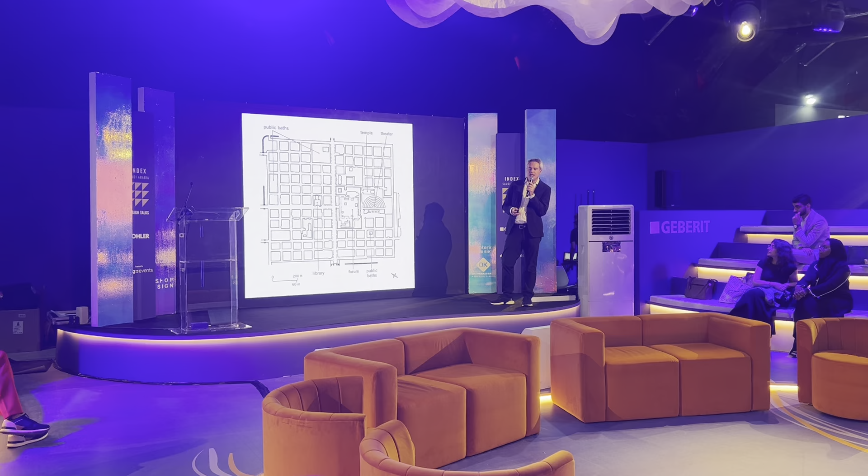spanning across different typologies from residential, cultural, offices, and infrastructure projects. One of the things I would like to talk about today is why we design the way we do and what inspires us. One of the interesting notions is that architecture from Roman times to the Forbidden City in China to Chandigarh—pretty much 3,000 years of architecture—hasn't really changed much.

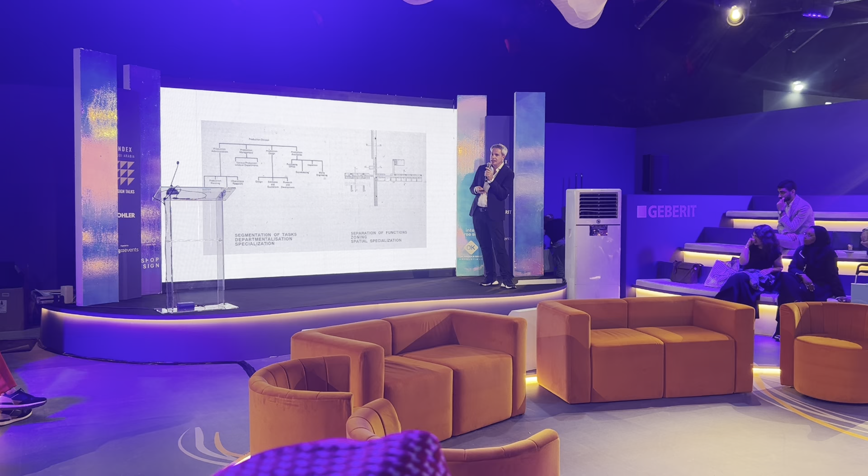Even modernist architecture, which tried to break out from tradition, really just replicated similar geometries and similar standards of architecture that the Romans established over 2,000 years ago. This was a very successful model, one that was adopted all over the world, but one that ultimately failed to fulfill the needs of modern society.

The reason it fails to meet the needs of modern society is because architecture cannot cope anymore with the complexity of our daily life, and buildings are starting to fail us. You can see cities around the world looking more and more similar to each other, so you don't know whether you're in London or in Moscow.

The usual answer from architects has been to deliver very uniquely designed buildings, i.e. icons. Unfortunately, these icons, at one point, start to cancel each other out, and you start to lose the uniqueness because you have this cacophony of images.

The same happens even here in Riyadh. Cities more and more, whether in Asia or Europe, start to look similar. One of the few things that helps us organize this chaos is actually natural systems, like the River Thames. That's really what inspires us as architects.

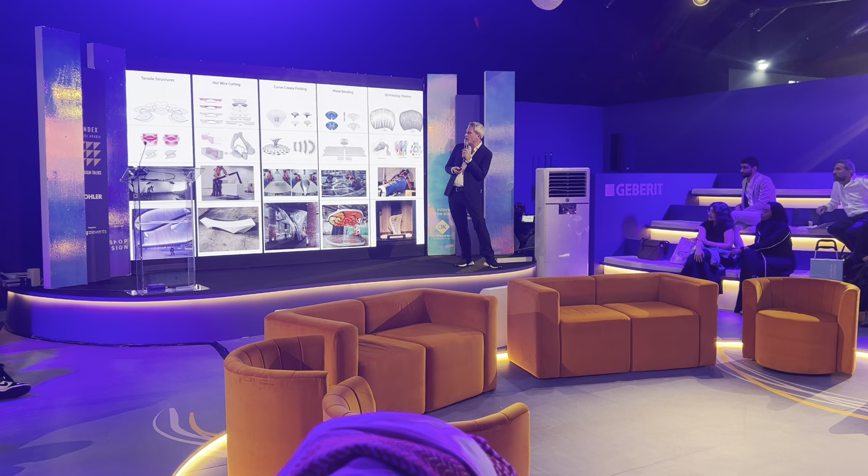We do that through digital means, through model making, through internal discussions and presentations. We also created a series of groups that specialize in innovation, where we create our own tools, our own robots, our own construction machines, because industry wasn't catching up with us fast enough.

We've been doing that with concrete and with timber, and we decided to bring some of these robots into the office, where we can make our own molds for our concrete systems.

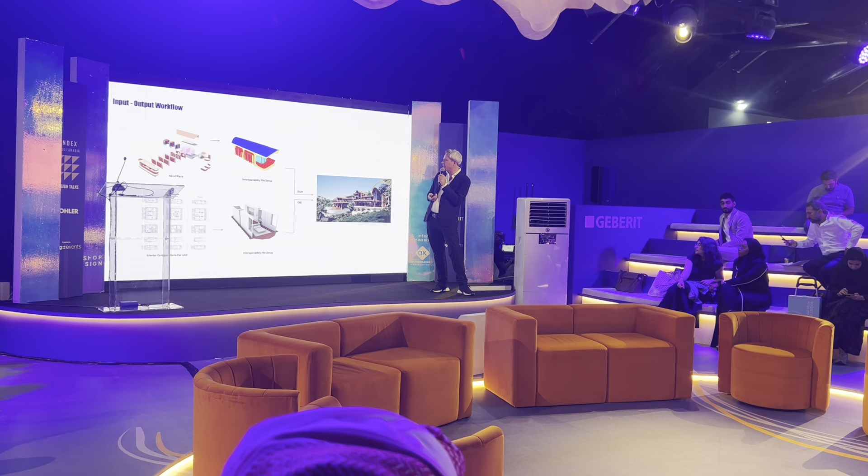The next generation of design is actually moving towards the metaverse and towards spaces of collaboration where our clients and consultants can physically or virtually enter the space and collaborate in a third dimension, where the clients of the future can customize their home through software systems, deciding from a kit of parts what their home will look like, creating unique designs different from what we anticipated in the first place.

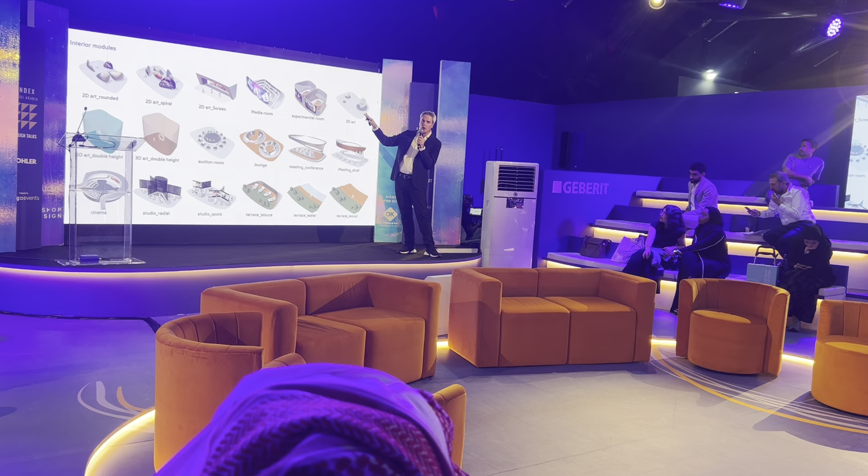So the role of the designers becomes more about giving a kit of opportunities and elements, and then leaving the end user to compose the world that works better for them.

Some of the key design inspirations we constantly work on is the idea that vertical towers should not just be vertical, but should have some kind of volumetric articulation to respond to what happens inside the tower, and to the structural needs and forces that move them.

How we can create fields through repetition and differentiation. How do we create a different system of self-similar buildings that actually coexist in a coherent ensemble?

And how we touch the ground, how we create a more human scale approach to large scale buildings, with connection to citywide infrastructures such as car parks and metro stations coming in directly from underneath our buildings.

The internal void is for us a very important element of design. This becomes the true element of connectivity for the users, a true space where we actually meet other people working in the same building or living in the same environment.

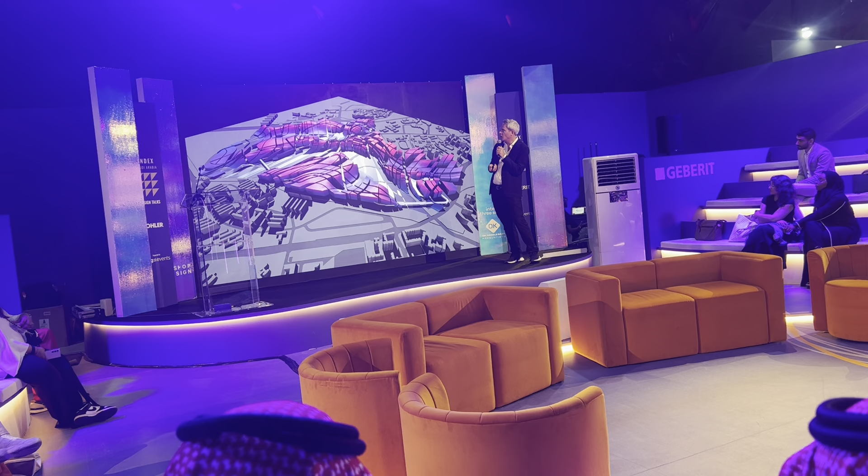I will take you through a number of projects we worked on throughout the years, different scales and sectors. This is the very first project we worked on, a master plan we did for Singapore, a whole stretch of the city called One North, which had a river formation in the middle.

We decided to create a kind of second nature, an artificial field where buildings are deformed by forces and by connectivity between them, not just by subdivision of the ground and plots, but more about creating physical connection between units and an overall roofscape and facade composition that will make sense for such a large-scale project.

We went back to a very similar theme five years ago for a project called Unicorn Island in Chengdu, where we had to design and build 1 million square meters worth of offices, residential, and hotels, as an incubator for startups in the south part of the city.

Our response to the brief was to create a project with the theme of the ellipse as a common motif, where the ellipses become courtyards, become interlocking elements, become towers, towers fusing with each other, towers breaking apart and creating loops and H shapes, and even ellipses creating the landscape around the island itself.

You can see how the element of the ellipse becomes also a three-dimensional motif on the skyline of the city and on the lake, and then again, coming down to the human scale approach and the landscape of the building.

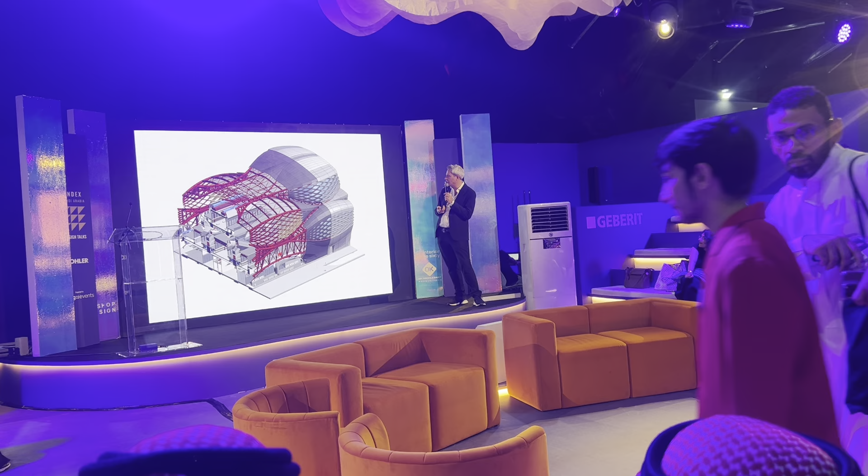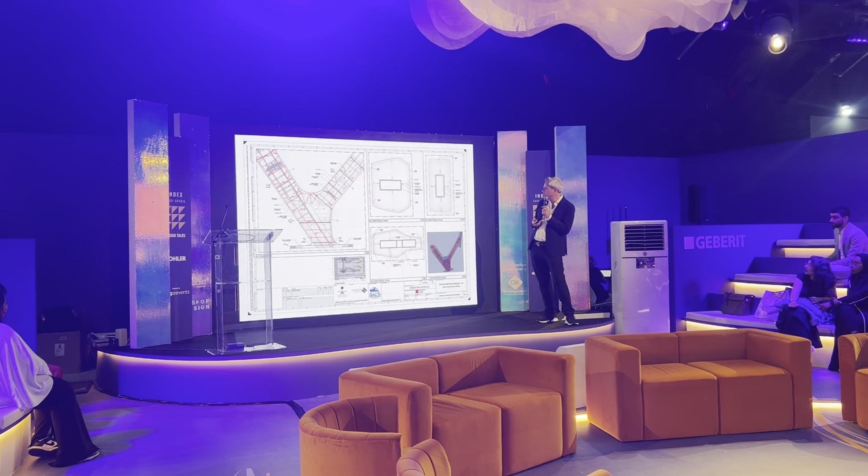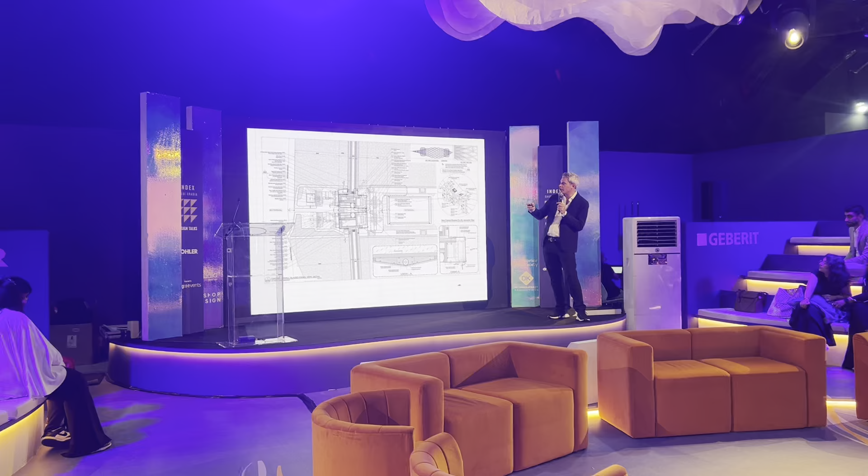You can see some of the initial pictures of the project, which is nowadays looking almost completed. This was done through enhancement of these digital models into BIM, where all the different disciplines had to input design data and coordinate their systems, and we could check for clashes. There were clashes, of course, but we were able to resolve them on the digital tool before going down to construction. We really went down to one-to-one and one-to-two details to make sure the final quality would be flawless.

This is one of the stadiums we designed for the Qatari World Cup in 2022. The design was inspired by the dhow, a regional sailing boat. We wanted to create a building with a roof that would be closed during the day and could open up at night, creating a lot of natural cooling of the building. The theme of this sail-like roof gets carried on the facade system.

Here you can see some of the interior shots of the stadium, with the cables that are holding up the removable roof.

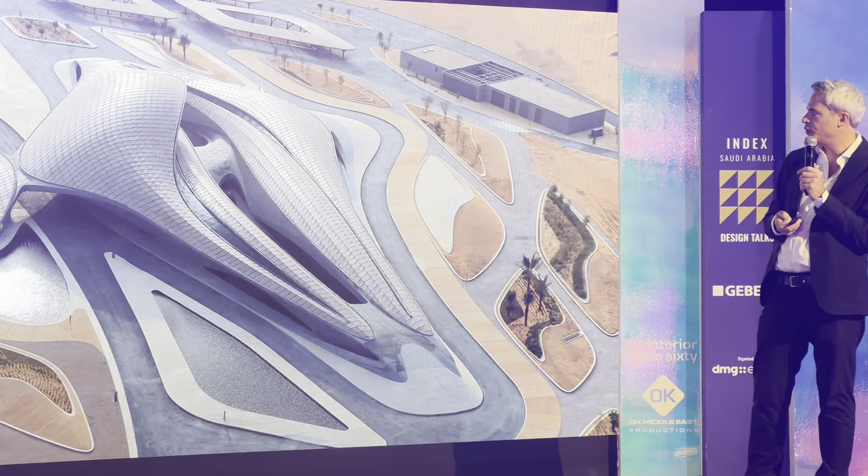This is an office building we did for Sharjah a few years ago, for BEEAH, the municipal waste treatment company. Sharjah is really pushing for a very low-impact refuse system, and they wanted their office building to reflect that. At the same time, the building was built very close to the refuse treatment plant in the middle of the desert, so we wanted to create something that looked as if it belonged there.

The geometries we used were borrowed from the dunes, and the dunes become this concrete roof, while the glass forms vertical elevations facing north. On the inside of the building we have natural light, and a ceiling that reflects diffuse light but also extracts heat, while ventilation is supplied from the bottom. Then we have the private office for top management, where more luxurious materials and timber come into play.

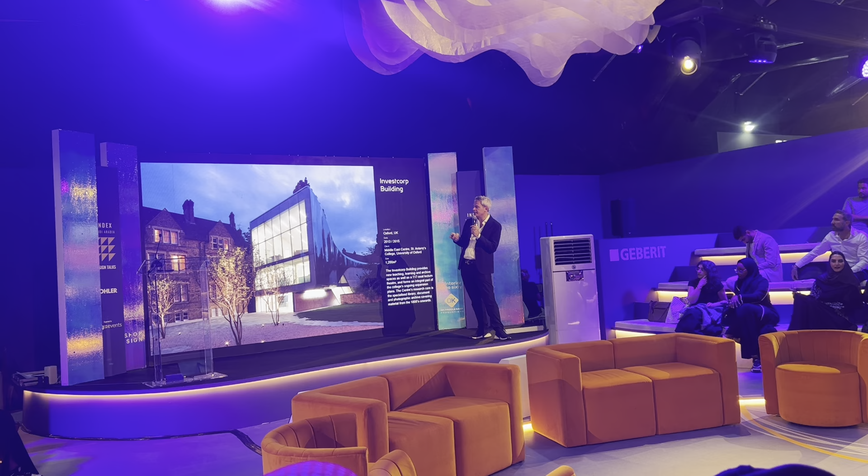That's a very small building we did in Oxford - an institute for Islamic Studies at St. Antony's College. One key challenge was dealing with heritage. The normal way would be to borrow and mimic the past, but what we wanted instead was something uniquely modern, quite strong, but at the same time very respectful, using stainless steel and brushed stainless steel to reflect the colors of the bricks around us and the sky - a building that ended up getting a conservation award for its positive impact on the student campus.

You can see here how there was an old tree that we decided to keep, and how the building form really kind of wraps around nature and allows nature to come in.

This is also a university building in Vienna, actually two elements of the campus for economic studies. We have two volumes that interlock, and in the clash between these two volumes we have the vertical circulation, as much as possible staircases, where we want to encourage students and professors to come together, exchange ideas, bump into each other, and have that kind of high performance campus the project wanted to create.

Very small office building in Prague, Czech Republic, where we created two volumes that face each other over the railway, with this beautiful golden geometry coming down from one of the towers. In this case, we were also able to design some interior spaces, such as the main entrance lobby.

Moving a little further away from us, this is the first project the practice did in China. It was quite a seminal project for us, because it was our first concert hall, and a building that sits over the Pearl River. The main inspiration and idea for us was to create these two pebbles, one for the actual concerts, one the rehearsal hall along the river.

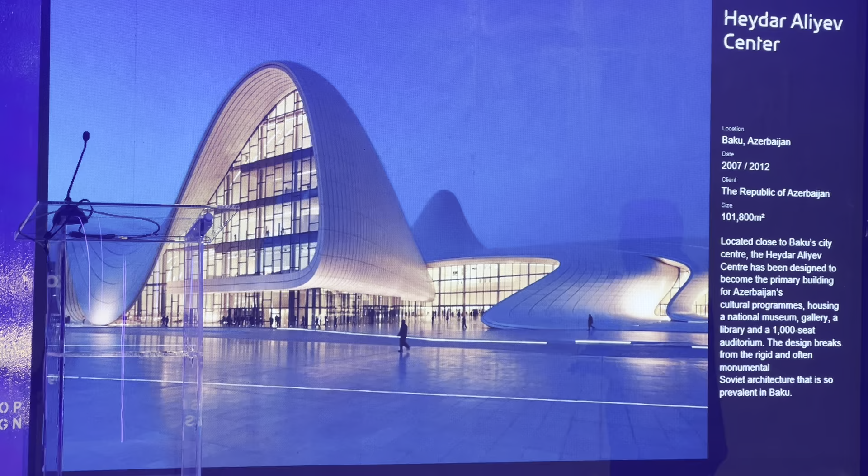Coming a little closer to us, this is in Azerbaijan, in Baku, where the current leader wanted to create a building to honor his late father, and at the same time house a library, a museum, and a theater. What we did was create this kind of undulating landscape where you actually don't know what is the building and what is the landscape around it.

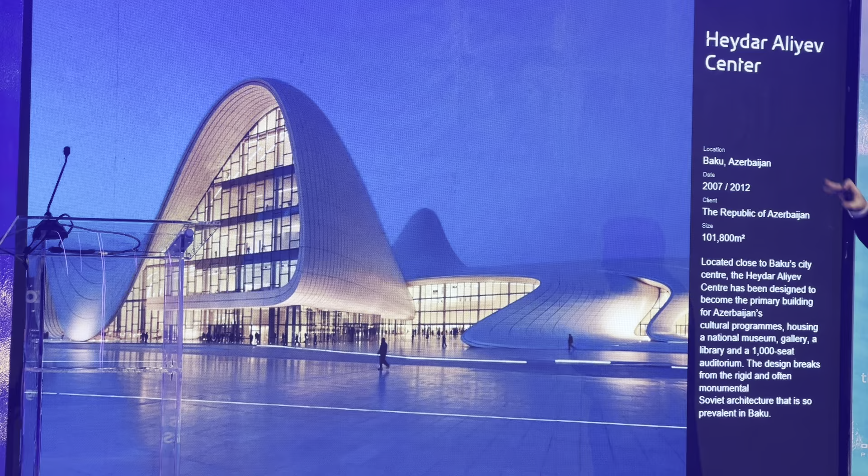We are not distinguishing between the different parts of the building, but cover these different programmatic elements with this soft, malleable form, the GRC and GRP roof that almost looks like it's peeling up from the ground.

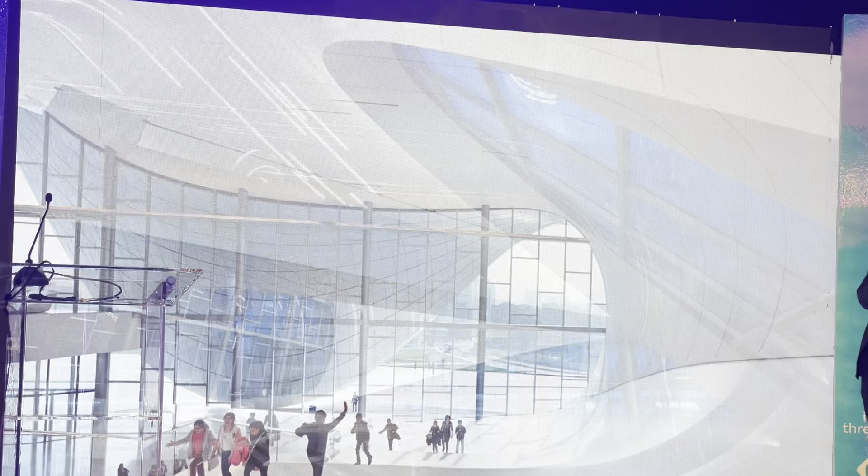Then the interior carries on the same very similar design language, with staircases that come off the walls and handrails that emerge almost naturally from the edge of the staircase. Once we go inside the theater, we have a richer palette with timber adding a greater human scale and human touch to the building geometry.

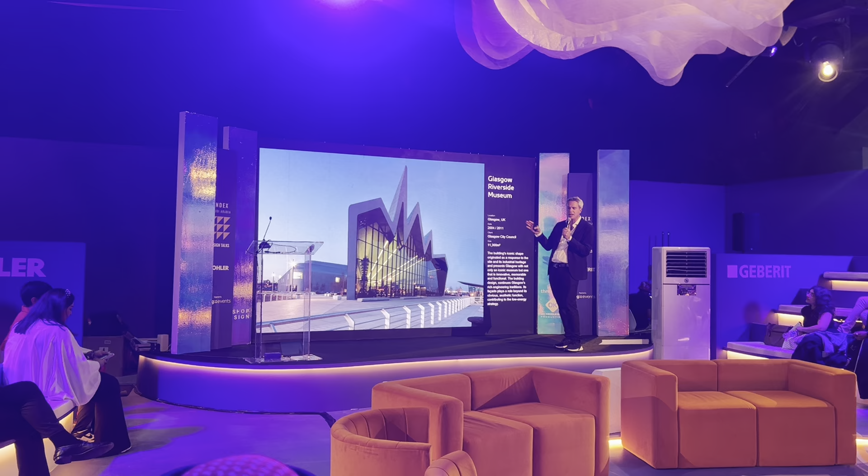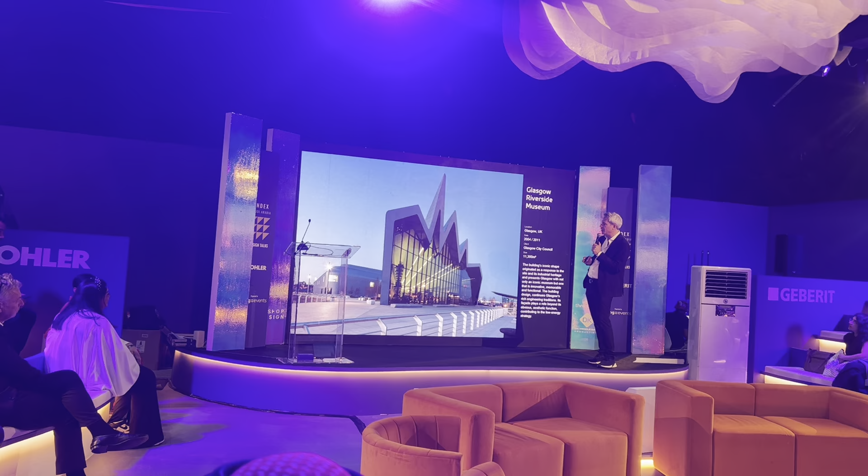This is a building for Glasgow. I'm showing this because what's also very interesting is sometimes this type of project becomes quite transformational. Glasgow is a city of 300,000 inhabitants, and this museum alone has 1 million visitors per year, so it has 3 times the population of Glasgow going to the museum every year.

Before we built the Transport Museum, a lot of these exhibits were actually in an old museum in town which was forgotten and hardly had any visitors, and it's now become a very successful part of the city.

This is a science fiction museum which we delivered for the city of Chengdu, also in China. Interestingly, when we did the competition, they told us we have a Worldcon in 1 year, so we only had 1 year to design, build, and deliver this quite large museum building.

We're talking about over 20,000 square meters of GFA, and we were able to work with some of our networks of metal cladding contractors to deliver this incredible building, where you see there is a large escalator that takes everyone up from the main lobby to the main room through this kind of high-tech science fiction experience.

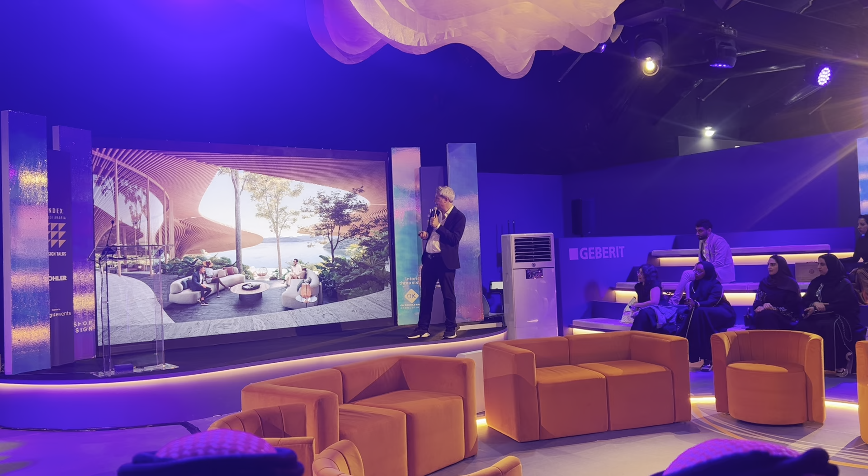So I showed you a slide of this project earlier on. This is Papagayo, a small residential project in the Caribbean where we actually bring our geometries in direct contact and connection with nature. So timber becomes the structure for the roof, but again, the kind of geometrical design is very similar.